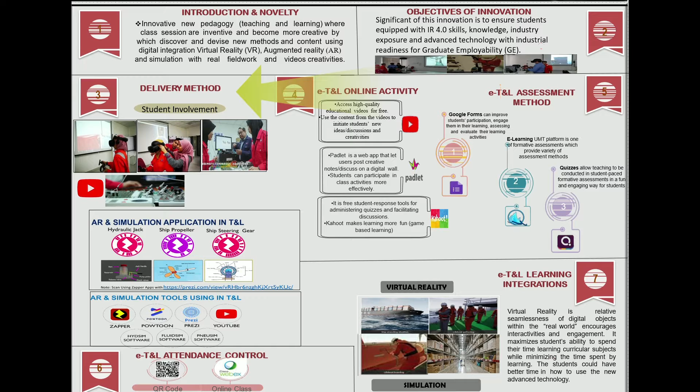On the delivery method, the next section covers student involvement. I let Prof. Wan Nursani present this session. Please, Prof. Thank you, Datin. My respective panels, now I want to show my delivery method.

I teach students how marine fluid power works, i.e. hydraulic pneumatics, and how to use hydraulic pneumatics in the maritime industry. So the students will understand how industrial revolution advances from low-cost industrial revolution 1.0 to advanced automation in IR 4.0. I will show you the video clip after this.

Normally, I bring students to the lab and show them how the components work. This semester, I converted this experience into video form. So it's my pleasure to share with the MPI panels the video that we just prepared.

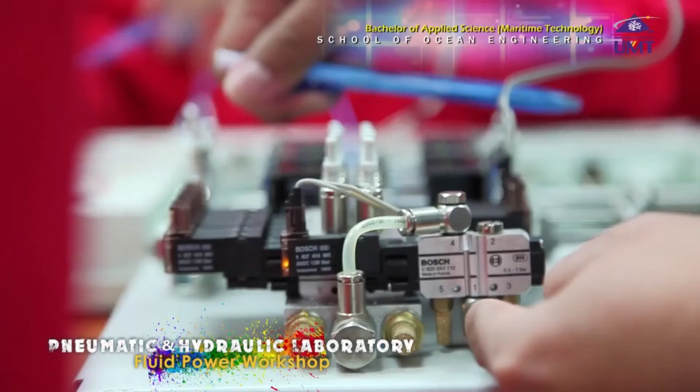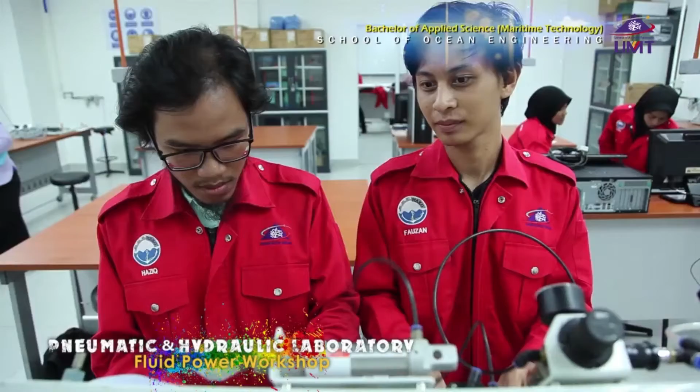In the previous video, we saw some practical work. Besides that, I gave an assignment to students. Advanced technology is used in teaching and learning.

I use augmented reality and virtual reality methods. Projects are given to students where they have to use augmented reality and simulation softwares. They can make their projects using free software available online, for example Prezi. Other software students normally use are Zapper, Powtoon, Prezi, HydSim, FluidSim, and PneuSim.

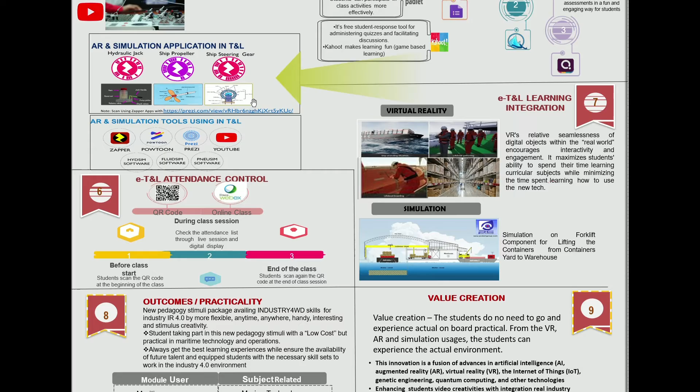So after this, I'd like to share with you one of the students' projects. Now I want to share some projects done by my students using Prezi software, which is free software available online. As an example, Afiqah and Devi prepared interactive learning materials entitled Bow Thruster for Ship Propeller.

Other students can learn what a bow thruster is when they click on it, or they can see the components and sub-components by selecting the respective icons. Now I want to show you the applications where we include audio and visual to explain how the bow thruster works. Davey explained the required components needed to actuate the bow thruster.

The students can use other software integrated with Prezi, for example Powtoon, Zapper, HydSim, PneuSim, and FluidSim. So you will see after this how they integrate all this software.

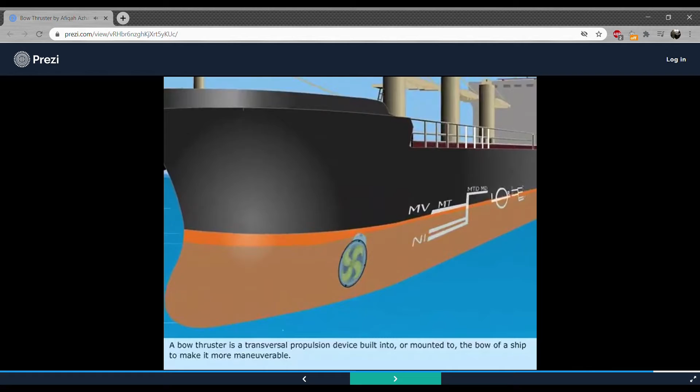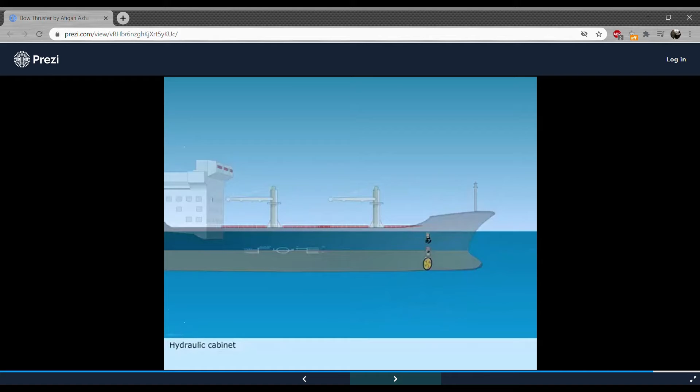This media will give a clear understanding of how a tunnel bow thruster works. A bow thruster is a transversal propulsion device built into or mounted to the bow of a ship to make it more maneuverable. It consists of a thruster, hydraulic cabinet, gravity tank, centralized control device, and control panel.

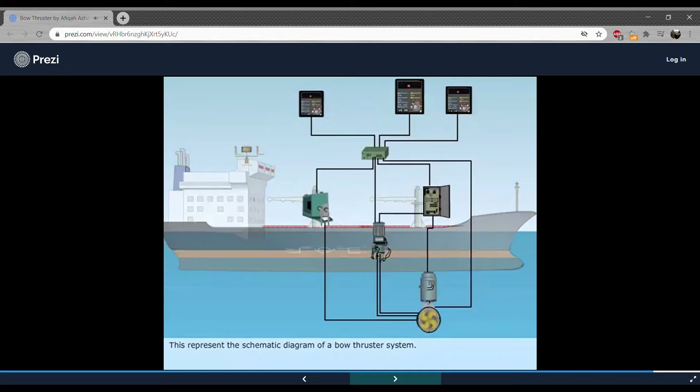This represents the schematic diagram of a bow thruster system. Power is transmitted from the prime mover or electric motor through a flexible coupling, input shaft, and bevel gears to the propeller shaft, rotating the propeller in a constant direction. The prime mover is an electric motor which drives the propeller shaft.

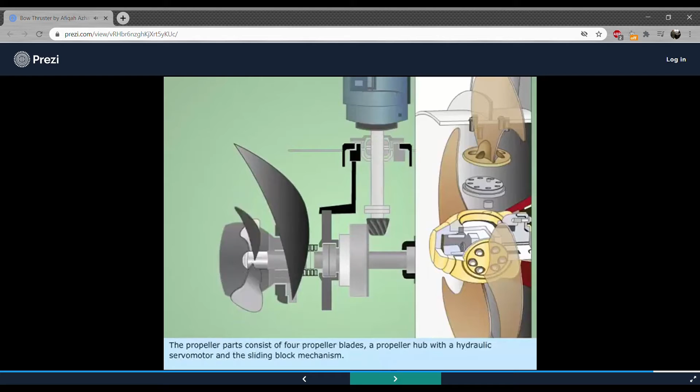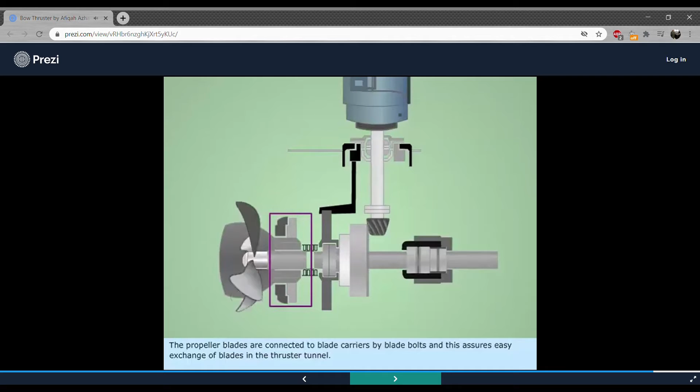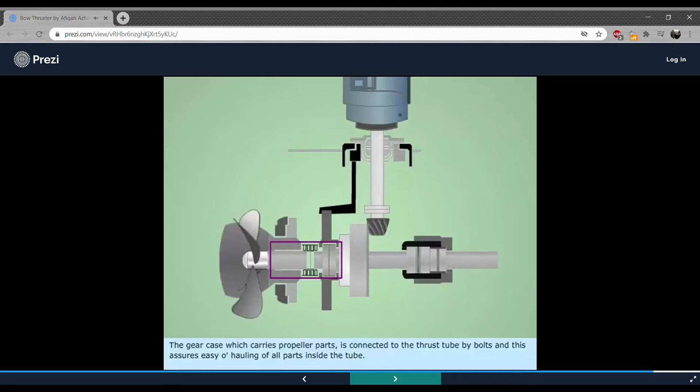The propeller parts consist of four propeller blades, a propeller hub with a hydraulic servo motor, and the sliding block mechanism. The propeller blades are connected to blade carriers by blade bolts, ensuring easy exchange of blades in the thruster tunnel. The gear case, which carries the propeller parts, is connected to the thrust tube by bolts, ensuring easy overhauling of all parts inside the tube.

Thank you, Rob. Since we are still on the MCO due to COVID-19, most of our activity was done online. Under e-T&L online activity, we have access to high quality education videos for free. We also use the content from the videos to initiate students' new ideas, discussion, and creativity.

Besides, we also use Padlet, a web app that lets the user or student post their creative notes, discussion, or digital notes on the wall. The student also has free response tools for administrating quizzes and facilitating discussion. We also use Kahoot, which makes learning more fun because it is game-based learning.

In terms of the e-T&L assessment method, we use Google Form where we can improve student participation, engage them in their learning, and assess and evaluate their learning activities.

Besides that, in UMT we are using the e-learning platform, which provides a formative assessment with a variety of assessment methods. We also have quizzes which allow teaching to be conducted as student-paced formative assessment in a fun and engaging way for the student.

We also control student attendance. Students are asked to use the QR code at the beginning of the lesson to ensure they are coming to class, and during the class session we can check the attendance list through the session and digital display. At the end of the class, the students are again asked to scan the QR code so we can check their attendance.

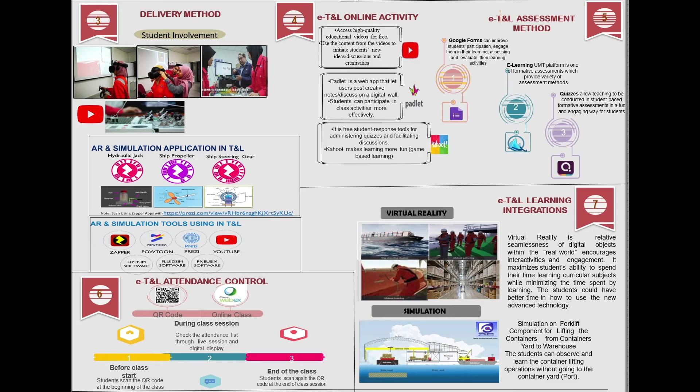For teaching and learning integration, the student can be better equipped with understanding of advanced technology and practical skills, for example virtual reality, where they have relative seamlessness of digital objects which, combined with the real world, encourages interactivity and engagement.

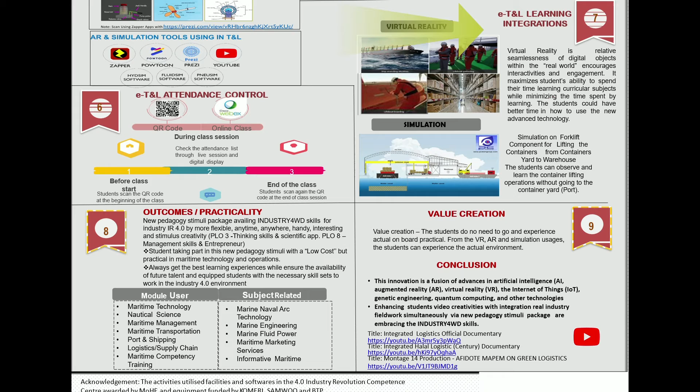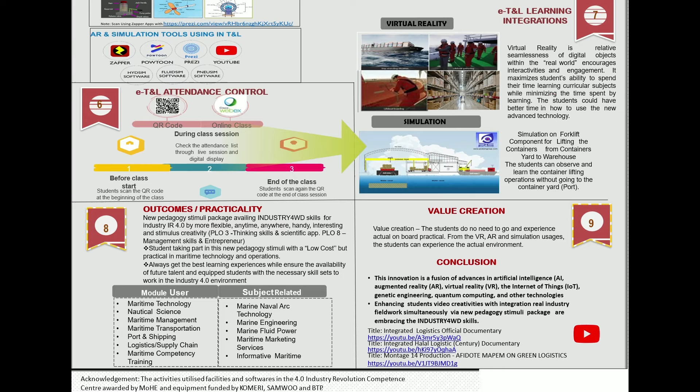In terms of simulation, for example, I give the example of the forklift component, used for lifting containers from the container yards to the warehouse. The student can observe and learn the container lifting operation without going to the container yard port.

The outcome or practicality of this new pedagogy stimuli package is availing INDUSTRY4WD skills for Industry IR4. It is more flexible, anytime, anywhere, handy, interesting, and stimulates creativity. It falls under PLO 3, thinking skill and scientific application, and also PLO 8, management skill and entrepreneurial practicality.

Students taking part in this new pedagogy stimuli will have low cost but practical experience in maritime technology and operations. They can always get the best learning experiences while ensuring the availability of future talent, equipping students with the necessary skill set to work in the Industry IR4 environment.

This package can be used in a modular fashion by users of maritime technology, nautical science, maritime management, maritime transportation, port and shipping, logistics and supply chain, and also maritime competency training or courses.

It is also related to subjects such as marine naval architecture technology, marine engineering, marine fluid power, maritime marketing services, and informative maritime. In terms of value creation, the student does not need to go and experience actual on-board practice, but from VR, AR, and simulation usage, the student can experience the actual industry environment.